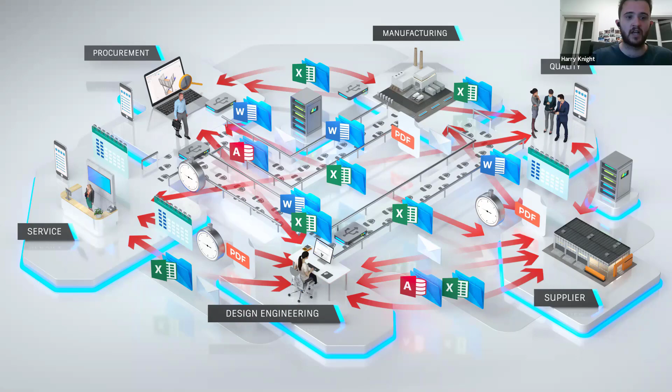To combat these challenges and capitalize on the ongoing convergence of design and manufacturing, there's a definite need to connect and automate design and manufacturing processes, so we can reduce iterations, errors, and improve delivery times. Furthermore, advancements in cloud computing and mobile technology, combined with automation, allow us to bring new means of collaborative working to manufacturing.

So Fusion, to take advantage of this shift, has been built to reimagine the product development process and provide people with access to their data in a connected, flexible, and seamless way. To do this, we've brought technology together that's previously been delivered separately, and we're investing rapidly in intelligent means of automation.

Furthermore, Fusion's software has been architected so that collaboration is a natural part of the design and manufacturing process. This means we're positioning you to start working in new ways, in an industry where no other software vendor, that I'm aware of, has this type of planned-out strategic approach. It means we can provide you with the technology to take advantage of the next-generation workflows available inside Fusion.

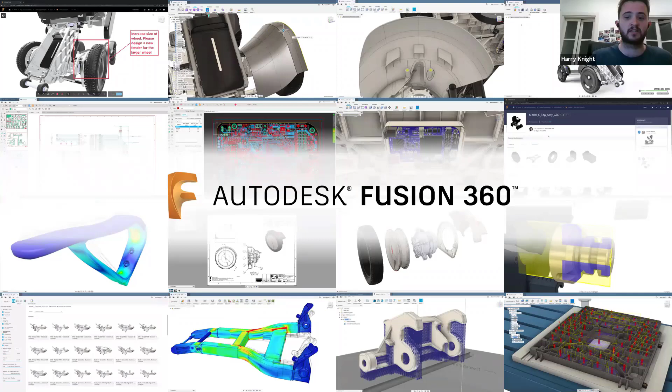Like I mentioned at the start, we need to find a new way of thinking, a new possible. We believe Fusion 360 is that new way of thinking, that new possible. It enables product designers and manufacturing innovators to achieve this new possibility in the way they imagine, collaborate, and create. It allows businesses the agility and connectivity to meet growing demands, allowing you to spend more time innovating as opposed to iterating.

It gives you the ability to achieve the new possible in ways that better your business, to shape a much more thriving future. And just touching on one of the final things here, one of Fusion 360's great capabilities is its flexibility. By flexible, I mean it really is a flexible piece of software.

So you have things like the flexible subscription model, where we're able to go from 1 month to a year to 3 years. You can switch it on and off whenever you feel like. You've also got flexible account management and CAD/CAM modeling.

The operating systems you can work on include Windows and Mac, or even your mobile, your phone, tablet, whatever it may be. Because your data is stored in the cloud, you can access it from anywhere.

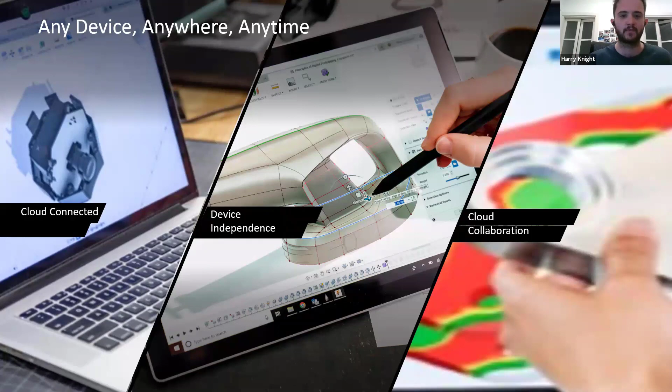So even if you go to a customer and you haven't got your laptop with you, you can just log onto a web browser with your username and password and show them what you want on Fusion 360. And then finally, a good handover point here for Jonathan, is the idea that you've all joined: the flexibility of remote working, because you can access that data from anywhere on any device.

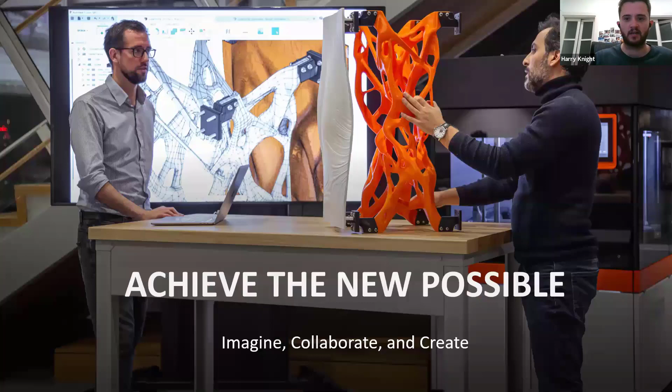As Harry mentioned, we'll be looking at several different points inside Fusion and inside Fusion Team, and we'll be doing all of this live because otherwise it wouldn't be as exciting or compelling to show you what the software does and how reliable these cloud services are. So a brief overview of the topics we'll cover: first, what accessing wherever you are actually means. We'll have a look at the licenses and system requirements for Fusion that you require. What teamwork means with Fusion and Fusion Team, and how that can make your dream work. What the power of the cloud can offer you for your day-to-day work.

How you can work with anyone and any existing data using the technology called AnyCAD. You can even work offline, even though this is a cloud-connected tool. And then at the end, I'll give you a brief peek into our roadmap, which is actually a big part of how we communicate with our customers, because we like to be open and engaging with our community.

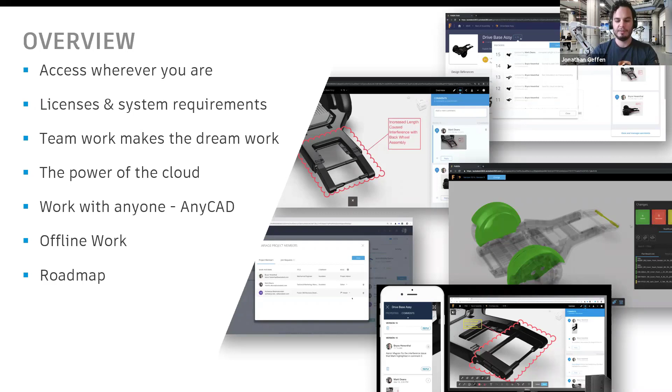So let's look at what we mean by accessing wherever you are. Fusion, different from traditional CAD software, is cloud-based, and that means your license is actually attached to your Autodesk account. So that means if you want to log into Fusion, you use a username and password instead of serial keys or dongles that you would have had to pass around in the past.

What this also enables you to do is sign in on different computers at the same time. You can only work on one computer at a time, though.

Let me give you an example scenario. This happened to me a bunch of times in the past: you're working on something in the office in your CAD tool of choice, then you go home, done for the day, and at home you realize, oh no, I need to make a change for the presentation tomorrow. So you try to log on to your software, but you can't because you're still logged in at work. Fusion can completely deal with this, because you have session management, which means once you log on at home, you can just pause the session at work and continue working as if nothing happened, continuously, on your computer at home.

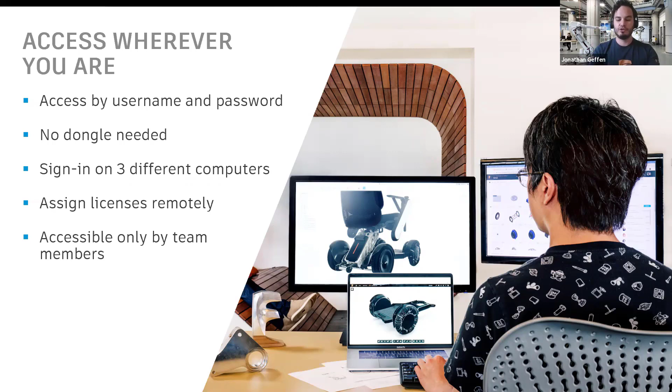Also, license management is done centrally and remotely. So for you admins out there managing all the licenses your team members are using, you can assign these licenses from a central position inside the Autodesk account page. And of course, your data is only accessible by the team members who are actually inside your team and your projects. We'll look at the details of that granularity of control over who accesses your data in a second.

Regarding system requirements, we get asked this a lot, actually. I see this question a lot on forums, people asking, hey, what computer should I get for Fusion? Actually, Fusion requires much lower system requirements than traditional CAD packages, because it's built in a new way, on a new architecture, so it can leverage multiple cores and, of course, outsource certain very resource-intensive tasks to the cloud. That also means you don't have to worry about so-called approved hardware, where you'd need a specific graphics card to qualify for support.

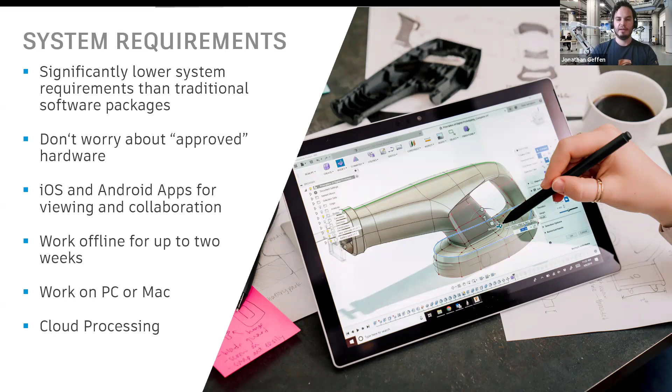As Harry mentioned, you can work on a PC or a Mac, so it's platform independent. There are even apps for iOS and Android for viewing and collaboration, for commenting and things like that. And you can even work offline for up to two weeks if you need to. But when you jump back online, then you can, of course, leverage the amazing advantages of cloud processing.

Now, just one last slide before we jump into the software: teamwork, collaborating in a team, can make your dream work, and it usually does, but oftentimes there are roadblocks to that teamwork.

So how do you usually access your data? How do you access your versioning?

Fusion Team is the backbone of how Fusion works collaboratively. You can manage permissions, files, versions, markups, and comments all from one single place. And you can connect teams across departments and multiple locations because it's cloud connected. So let's dive into Fusion right now.

I'll show you this design I have open, which is a pump assembly. I'm working on this collaboratively with my colleagues. I have certain team members, and I can see a comment actually just popped up. This is live - my partner Michael just made a comment 15 seconds ago.

I can open this up in my comment section on my CAD tool. If I click on that comment, it takes me to the location where Michael made this comment, and if I open this up, it lets me view this one-to-one to see what Michael actually wants me to do.

So he said, hey, can you please reduce the size of those fillets over here? Let's go ahead and do this. First, let me pop out this comments window and say, sure, I'll work on it, and post that back.

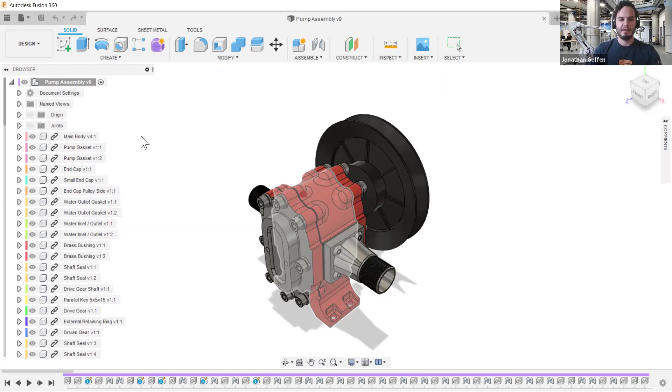This lets Michael know that I'm going to start working on this. I can dive into this main body where he wants me to make an edit and actually edit it in the context of the assembly, without having to open up this part separately.

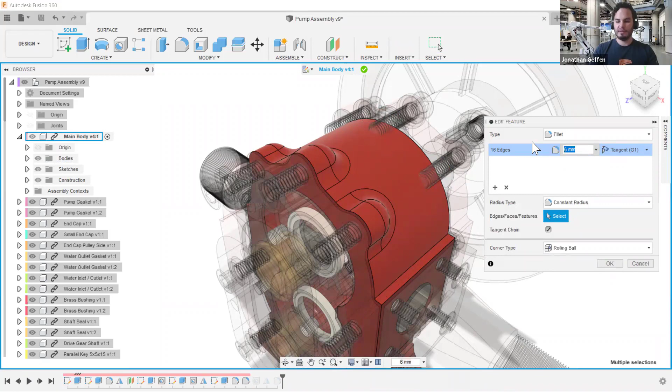I know the fillets are controlled by this little feature here in the timeline. Let me open that up and reduce it down to maybe 4 millimeters. All right, now my fillets are reduced.

I can finish my edit in place, zoom into here, open up my comment section, and take a quick screenshot, pointing to a specific part of the model and say, hey Michael, I can actually comment him in there, so he will definitely be notified.

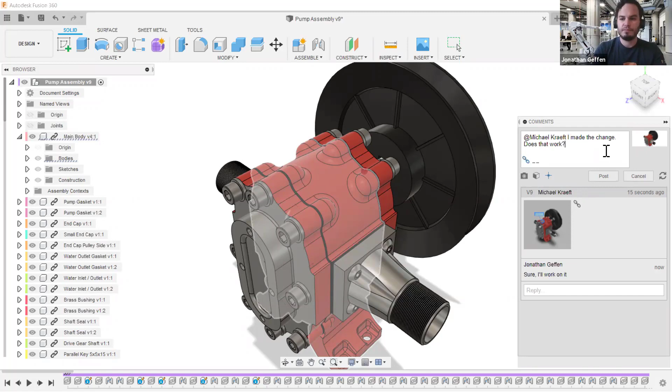I made the change - does that work? Then I can post this comment back, so he will be notified in either Fusion if he's working on it, or Fusion Team. This is how I can already collaborate on the data I'm actually working on.

And these comments refer to the versions of the file. So let me open up the data panel on the left-hand side. This is your connection to your data, because Fusion is a cloud-connected tool.

That means the software itself is installed on your computer, and all of the design, rendering, animation, simulation, and manufacturing - you can do all of this from the comfort of your hardware and your PC. And your data gets synchronized with your cloud.

Over here in my data panel, you can see on the top-hand side that I am working in a team account called EMEA Fusion 360 Technical Sales. That's where I do all of my technical sales demos. And I'm actually part of several other teams.

Every Fusion license comes with the ability to create one team, and with every Fusion license, you can participate in any other team that another user might have. That means you can collaborate with anyone who has Fusion worldwide, no matter their location or company.

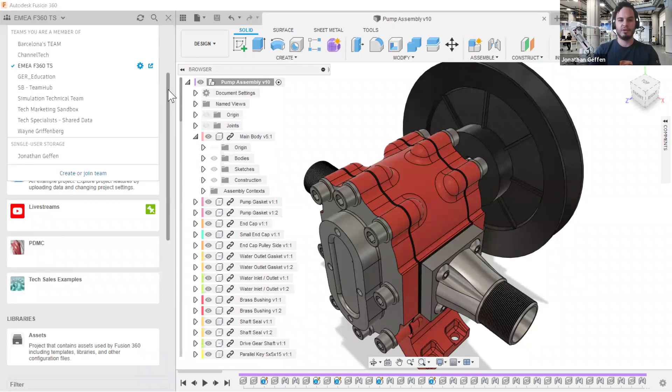I'm organizing my projects here - I can easily open up and create new projects, and I've pinned a couple of projects. This one we're working on right now is the collaboration webinar, and inside here I've got the pump that we currently have open on the right-hand side.

You can see I've already played around quite a bit with this model to create it and make some edits. This is actually already version number 10 of the model I've been creating.

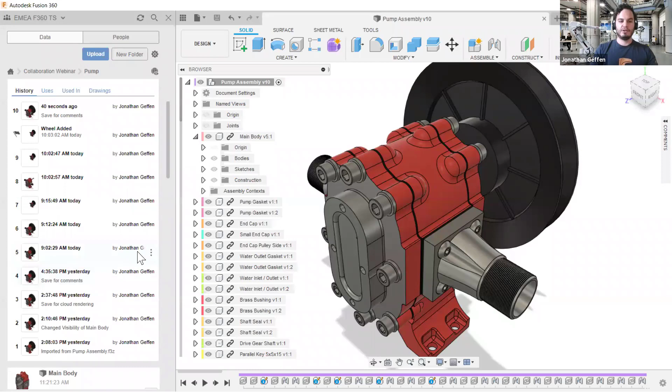If we open up the file, we can have a look at all 10 different versions that I created. You can see that Fusion has automatically recorded at what time these versions were created and by whom - that gives me an auditable trail of my design history.

At any point in time, if I need to, I can actually promote earlier versions to the top, or convert them to be milestones if I think this is a very important change to the design.

I have a little bit more granularity, which is I can have a look not just at the history, but also see what other parts my assembly is using, and I can open them up straight from here. So there's a connectivity between parts and assemblies. I can see whether this assembly is used in another assembly, which this one isn't, and I can check whether there are any drawings attached. Actually, here there is a drawing attached.

I would like to have a look at the content of my Fusion Team and my files on the web. I have different options to access this. If I want to access just this one file, I can view the details on the web from here, or view the details of my project on the web, or if I want to see the whole team, I can access that on the web over here.

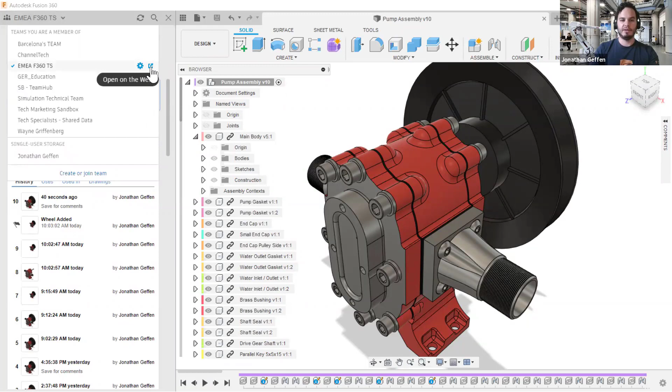So let's do just that, and I'll switch over to the browser where it's just opened up. Here I am now inside my Fusion Team, and you can see these are all of the projects that I'm currently working on. Let's dive into the collaboration webinar, and you'll see that the page for the webinar project is set up in a couple of different environments.

For one, we've got the content that we're working with. I can organize my files into folders. I've got a trash bin where I can revive deleted files if I need to. And I can even upload different file types that don't necessarily have to be Fusion files. You can upload any file type you like and use these inside Fusion Team as data storage.

In the second tab, I can see which project members are part of the project I'm working with. Here I've got 4 different people, 3 colleagues that I invited. If I wanted to, I could, for example, set Harry to be a viewer, and then he would only be able to view the files, not make any edits. But I'm going to revert that - I want him to be able to make edits.

In the wiki pages, you have the possibility to create a kind of documentation of the projects you're working with, which can be quite powerful if you want to document certain policies around the project or certain necessary information. So I've, for example, entered here the title and description of this webinar, because that's the project we're working in right now.

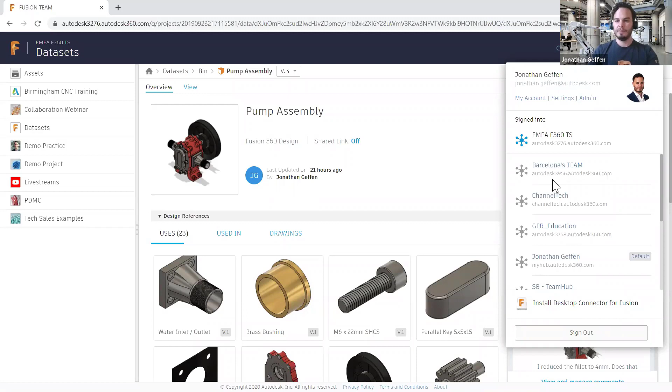On the very top right-hand side, you've got your profile, which gives you access to the different teams you're a part of, and the desktop connector for Fusion, which I'll show you a little bit later on how that works. From here, you can access, for example, your Autodesk account, where you can manage licenses and any updates you're doing - you can assign licenses to several users if you need to. Then you've got your settings tab, which is where you would set up your default team - for example, I want my default team to be the EMEA technical sales team.

And I've also got a personal hub where I can work on my personal projects. And if I want to, I can also leave any teams that I was made part of if I need to.

Just a short note on preview. I've turned this preview on, which gives me access to my projects on the left-hand side. If you disable this, you will not have this navigation panel. And this theme of enabling you to preview functionality is quite common in Fusion.

Let's have a look also at the admin tab. Over here, we can see we can set the team settings - any team name changes, whether I want to allow my team members to be able to share files with external collaborators, and whether it is necessary for team members to be invited and actually approved to join my team. Of course, I want this because I don't want anyone to be able to join my team.

Then I can check out here the members and roles of active participants, for example, whether there are any pending invitations or sent invitations that haven't been accepted yet by the people working in my team.

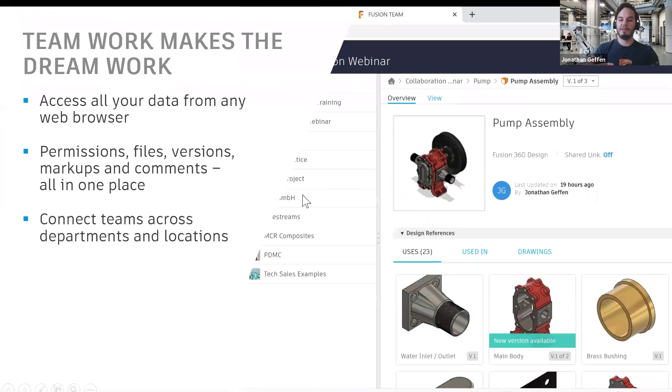So this is basically Fusion Team, and this is the backbone again of making that collaboration work.

Now let's have a look at what the power of the cloud means and how it enables you to effectively collaborate also with outsiders. You can share designs instantly with stakeholders without them even needing any CAD tool. You have a built-in file conversion, so you don't have to export files to certain versions for them to be downloaded. You can even host non-Fusion files if you want, compare versions, and you can comment, markup, and mention team members as I showed you before.

So let's jump back into Fusion and have a look at how we would do this over here if we wanted to share this assembly with someone else.

On any Fusion file, you can just right-click and elect to share a public link. This allows you to share an always up-to-date link, which will always refer to the most up-to-date version of your file with anyone who has this link. You can select whether this should be able to be downloaded or not. And if you need to, you can also set a password to specifically secure this link, so only people with the password can access it.

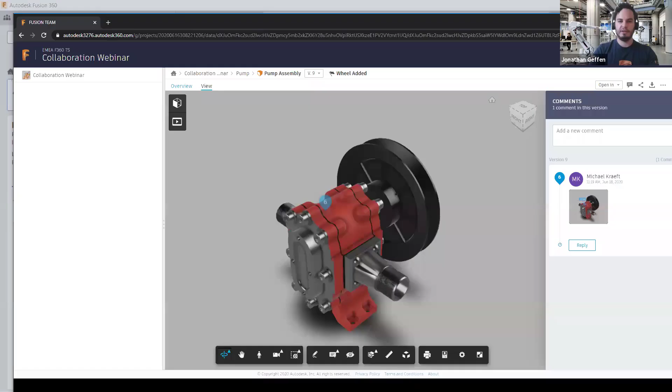So let's copy this link over here, and I will open up a different browser now, which lets me show you what this would look like when someone accesses your link without you actually being logged in. So let's actually open up a new incognito window because I seem to be still logged in over here.

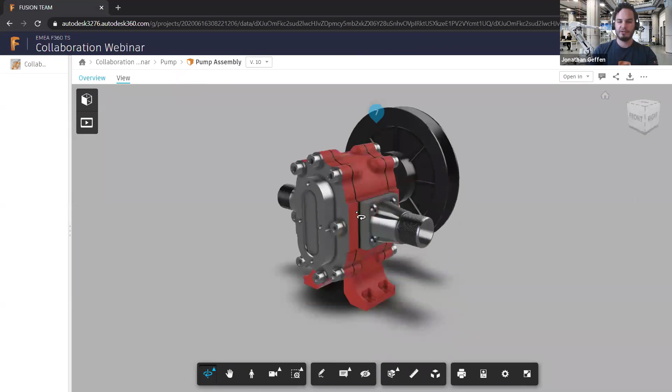This will let you access your file and view your data straight on the browser. And this works from any web browser, even on a mobile device or a tablet, you can view your design in 3D without having to install any plugins.

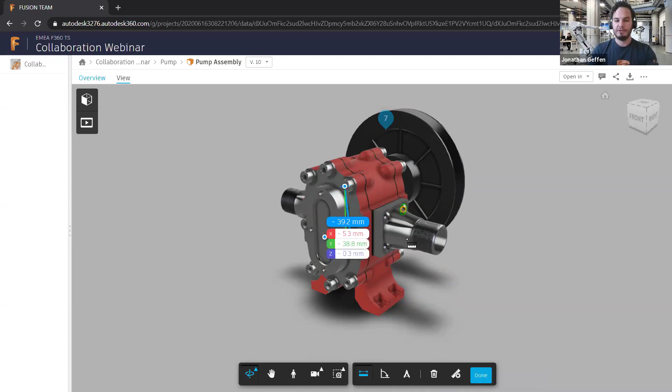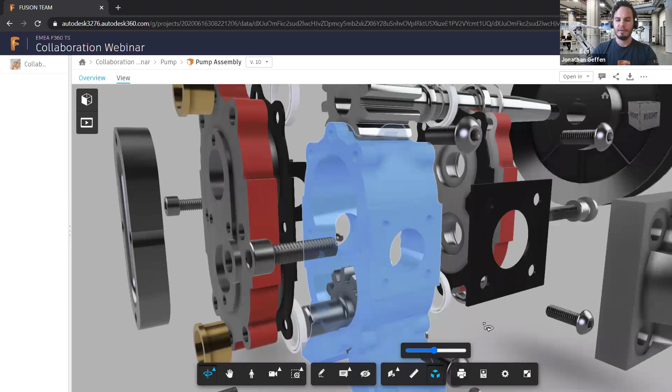This viewer is not just a viewer, but it actually enables you to do things like create measurements. You can create section views to look inside your model and see what's going on, explode your model to see all of the components inside. You can dive into each one, look at the properties of each component, the mass and volume, etc.

So you have a lot of capabilities here inside Fusion Team, even for external collaborators. Now let's switch back to my own Fusion Team where I'm logged in, and I'll show you a bit more about project coordination. I'm now in the pump folder, and if I scroll down, you can see this pump assembly is currently open and in use by me because I've got it open in Fusion 360 at the same time. This allows you to control who is currently working on which file, and if needed, you can elect not to edit this file while it's in use.

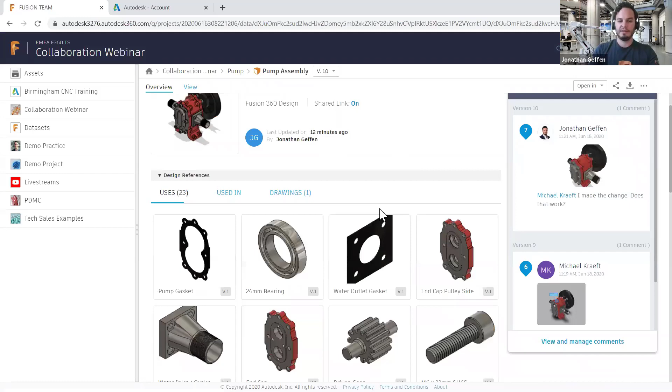If we look at each of these files, we can see the connected parts associated with this file, whether there are any drawings attached, like here, for example, there's a drawing. There's also a rendering saved alongside, and an animation inside here which I could view if I wanted to.

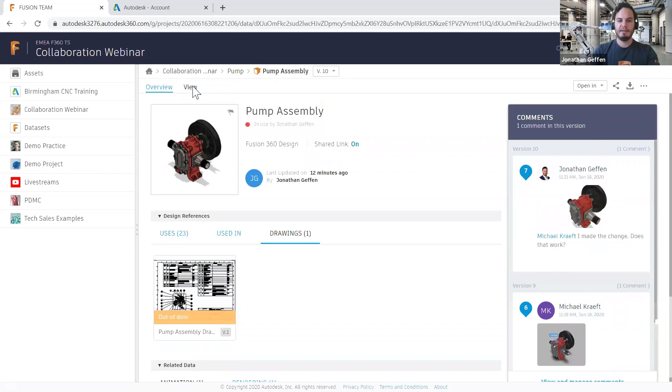On the right-hand side, we've got our comment section with the comments we made a little earlier. And if I view this file again over here, we have the possibility to again view our entire design in 3D, and if we want to, even export this to a different file type.

This is exactly what being able to download files from the shareable link will do for your customers too. They can elect to download different file types, even though you haven't exported them to a different format yet. So this can be quite powerful.

I know that in the past, I used to just share a screenshot with someone and say, this is the file, then have to export a step file so it's universally understandable. Then maybe something gets updated in the meantime, so I have to send another step file, and this can be quite tedious and slow, especially if the files are large. So this is a great way of collaborating with each other on these files.

Also, while you're in here, you have access to different versions of the files if you need to. So you can view all of the different versions of this file, and you can see I've actually got a milestone over here where I added this flywheel on the side.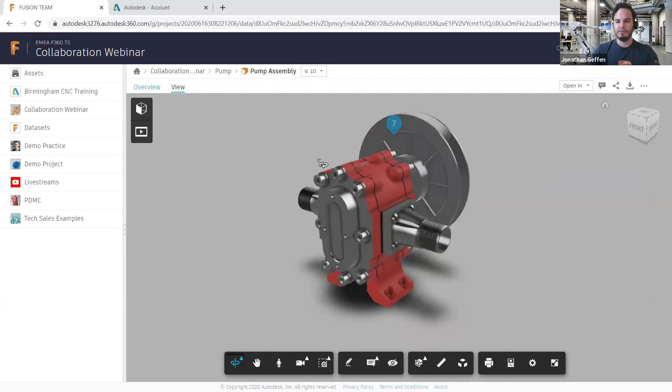If I want to, I can go inside and compare versions and select which versions I want to compare. So for example, maybe I'd like to compare version 9 against version 8, and view the design changes that were made.

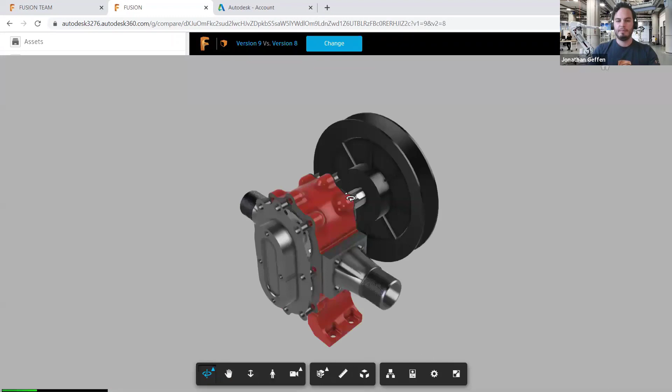It will take in both of these versions and show what was actually added, whether any files were removed, whether anything was modified, and I can dive into each one of these components and see which changes were made. So that gives you a great method of tracking changes live with the versions you're creating from Fusion.

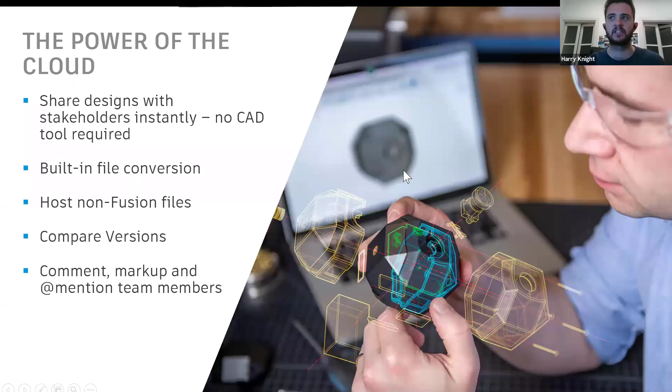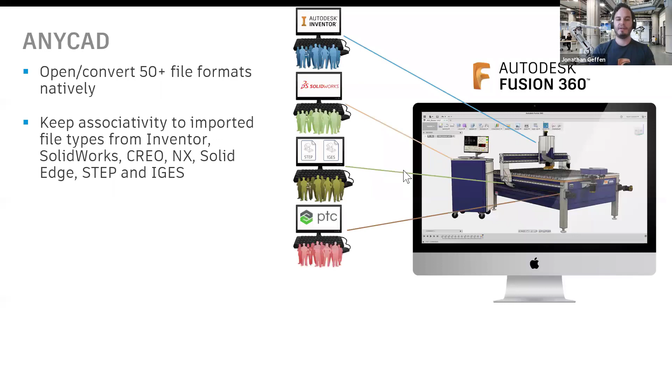Perfect, that's exactly the right cue for the next slide, actually. This is the technology that we call AnyCAD. What AnyCAD actually does is it doesn't just let you open and convert over 50 different file types natively, but it actually lets you keep associativity from imported file types from Inventor, SolidWorks, Creo, NX, Solid Edge, STEP, and IGES file formats. So what this means, and to me when I saw this the first time, it was quite mind-bending, because I hadn't seen any technology do this associatively before.

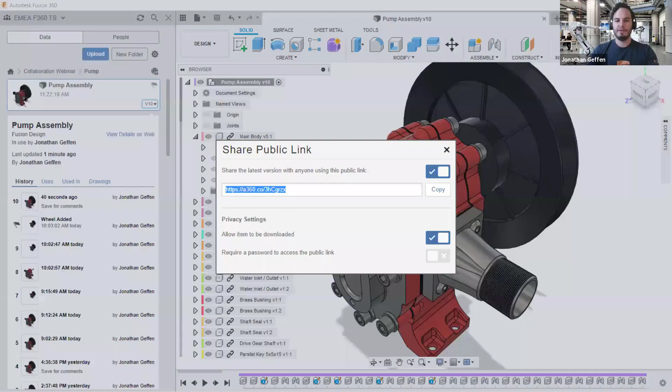What this means is, let's jump back into Fusion over here and jump out of this public link. I actually have a file over here that someone sent me, which is a SolidWorks file. If I show you the versions of these different file types, you will see that this is still currently a solid part file. This hasn't been converted in any way yet.

Once I double click this file, it actually creates a Fusion readable and manageable file, which I can work on. So if I open this up, this is a clutch cover for a motorbike, and this is still referring to the original solid part file.

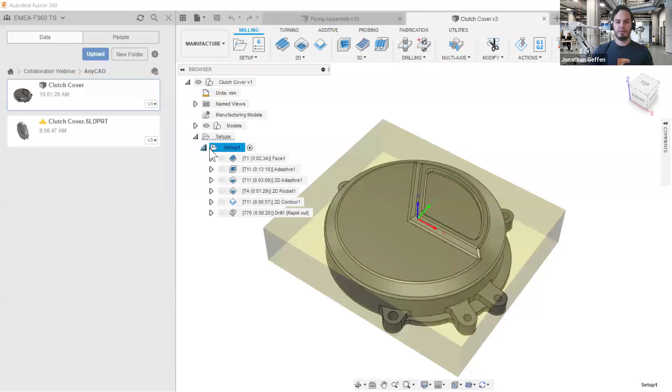So what I've done over here is I've actually gone into the manufacturing environment, and I've created a quick setup with a bunch of tool paths to actually cut out this part. So if I want to, I can go ahead and simulate this.

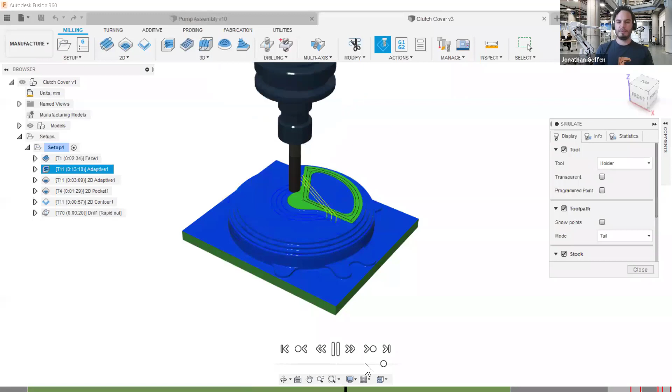Let's turn on some of these parts here, and I can have a look how this part is being slowly cut out. I've spent a fair amount of time on creating the toolpaths because, of course, these are multiple operations, multiple different tools. I need to manage my library, etc., in order for this to actually work and be able to be manufactured.

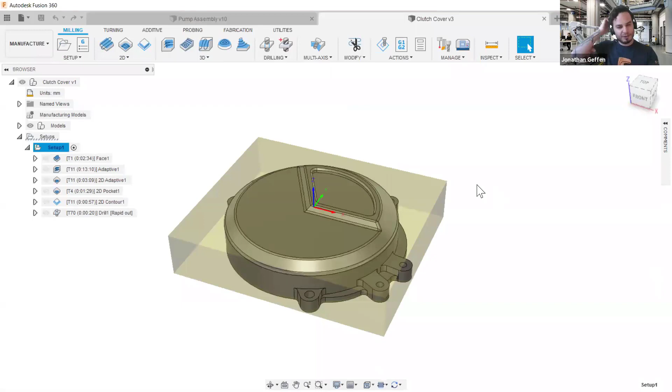Now, what happens if at the last moment, and I know this always happens at the last moment, at the most inconvenient moment, my colleague says, hey, you know what, I made a mistake with the file, we actually need to change something before we go into manufacturing. And I've already spent a bunch of time on this file creating those toolpaths.

So because I have used this imported solid part and I haven't actually converted it to any other file type, I can now switch over to my Explorer.

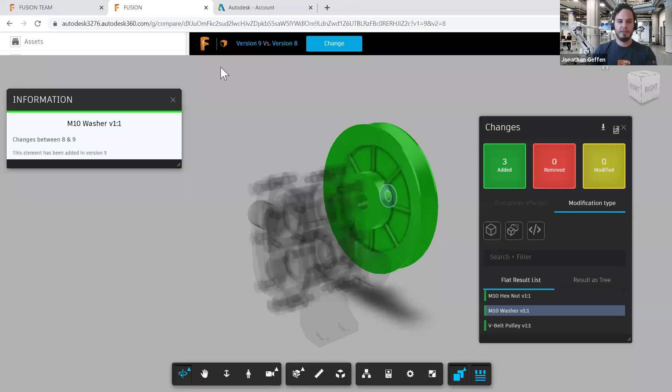And over here, I have what I briefly showed you in the Fusion team. Let me jump back here and show you where that is located. So you can go over here and download the desktop connector for Fusion. What this does is it basically mounts the Fusion projects as a virtual drive on your Explorer, so you have access straight from inside here.

You can go into my team here. I have my collaboration webinar in here and the AnyCAD file that I was just working on. And in my second browser window here, I have actually the second version of this clutch cover that was sent to me as a change.

So let me just copy this and paste it in here. Control V, and then it'll ask me, do I want to copy all? Yeah, let's copy all. And the desktop connector will automatically upload this file and then push it to my Fusion team. So if we switch back here to Fusion, now you can see that data has been renewed.

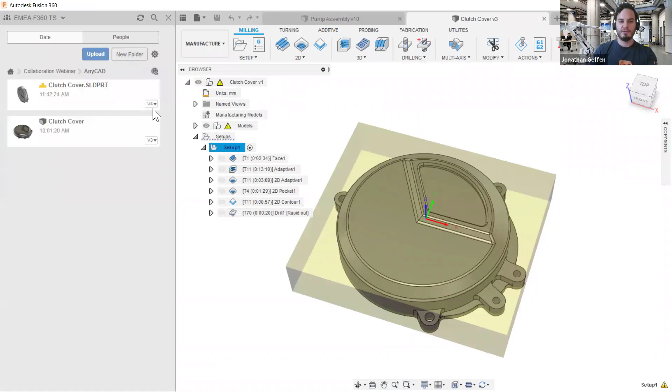There's now a version 4 of this file. If I jump back into the design environment, I can say this component is out of date, let's pull in the new version. And I can see here that the angle of this top pocket will have changed once it's pulled in.

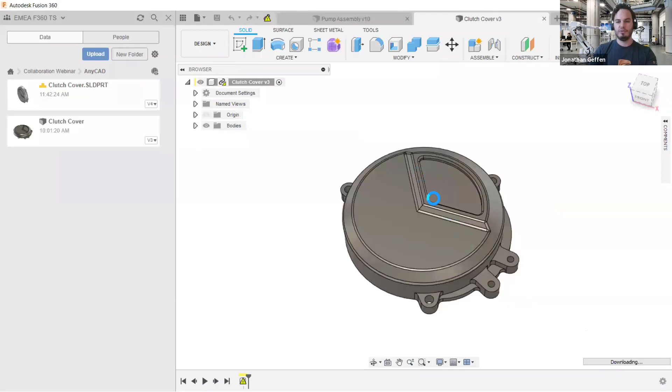So you can see it bringing in the new version here. It's currently downloading, and now this angle has changed. Because I've already spent so much time on manufacturing, all of my toolpaths are out of date because they're referencing the old pocket.

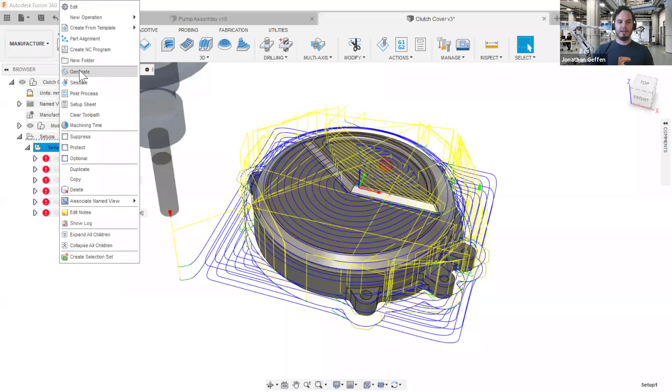But because Fusion is working associatively with the different file types, all I have to do is right-click and select generate, and it will regenerate all of the toolpaths based on the geometry changes I made with the new version, without me even having to convert the original file type to a Fusion file.

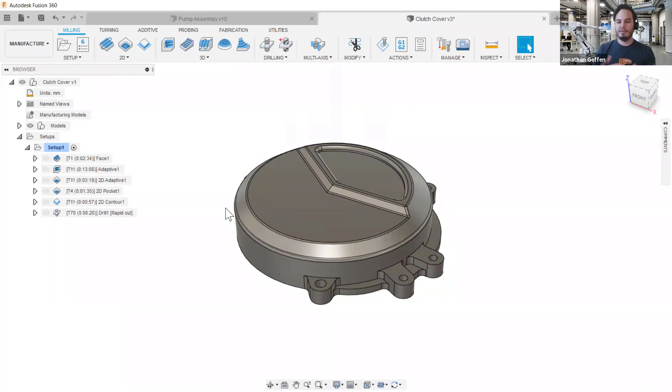So everything has adapted correctly, and I can now go to manufacture. That is the real huge power of Fusion, that you can work collaboratively even with existing data, or as we know, we live in environments where we deal with different data formats and software types. So this is exactly that AnyCAD functionality and what it does.

I hope that answered the question. I think it definitely has done. Actually, just while we're on that, John, there was one more question that popped up.

Yeah, it's more about usability in terms of Fusion. It was more, if you know other software such as PowerShape for example, how similar would Fusion be to kind of pick up and work with? I know it's not quite our topic today, but sure.

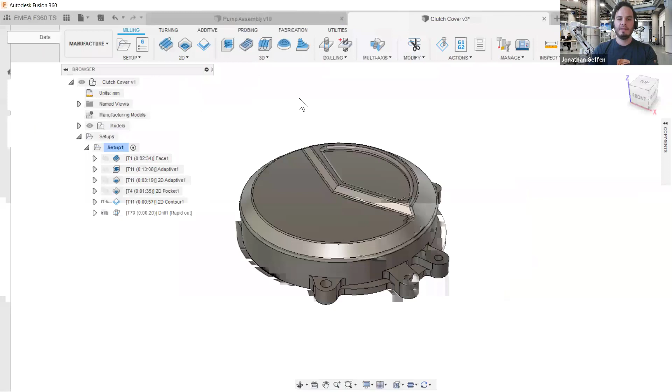Actually this is a good topic because Fusion is a very powerful tool, as I hope I've already been able to show you. It has a lot of areas and a lot of tools, but in comparison to other tools, especially traditional CAD tools, it seems a little simpler, whereas the functionality is actually just as or even more powerful. The reason being that Fusion was built up from the ground completely new, and it's just a very modern tool to work with.

What's really great about Fusion is that it kind of explains itself in the usage. So whenever I hover over any feature that I'm using, it explains itself, so I don't have to have a help file open at the same time.

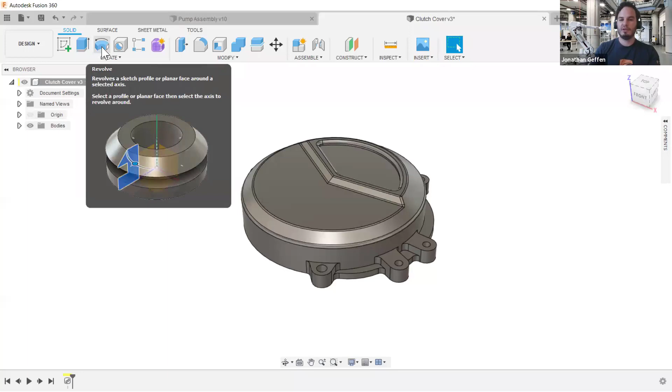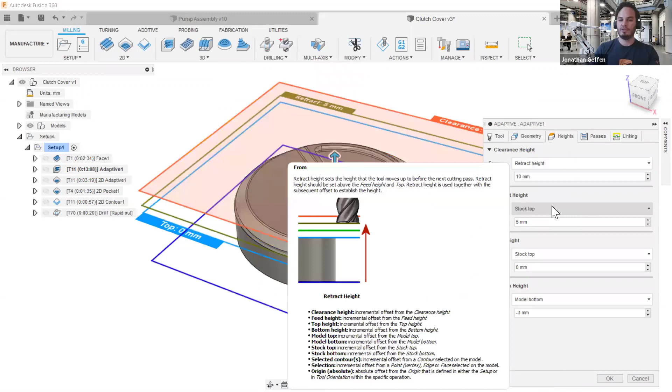For example, if I go into manufacturing, and I know this can be quite intimidating for some people to move into these areas when you don't quite know what this does, there are extensive tooltips that explain exactly what the software is doing, which areas you can change, and what that actually means for your settings.

So you're basically learning the tool while you're working, and that's really the best way to learn. In addition to that, we have up here our little help file, where we can open up a learning panel that gives you access to in-product tutorials.

And also you've got the learning and documentation page, where I would suggest going to the self-paced learning, which is a collection of learning paths that you can go through at your own pace, learning Fusion really from the ground up.

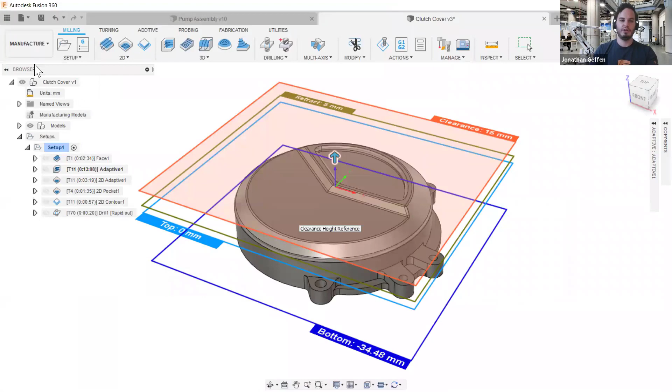And of course there's also a learning path around administration and Fusion team, introduction to Fusion modeling, transitioning from other software types, and anything in mechanical assemblies, generative design, product design with electronics, simulation, manufacturing, etc. So there's a lot of resources here for you to easily learn Fusion and adopt it as your CAD tool.

So let's move to the next point, which is offline work. I know this happens sometimes, especially as you're working from home. You cannot always guarantee that your fuses won't blow or things like that, and maybe your internet connection will die. This has happened to me in the past.

And most of the time when we talk to customers and they hear cloud, they're afraid that they require the cloud to be able to design and continue to work on their designs. In Fusion that's not the case, because you can actually set your status to offline, or if you don't have an internet connection, you will be working offline.

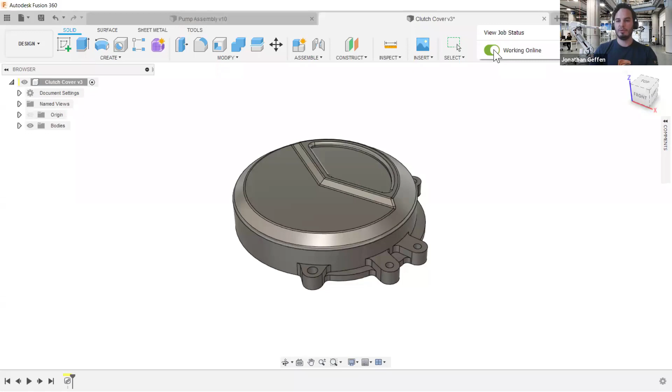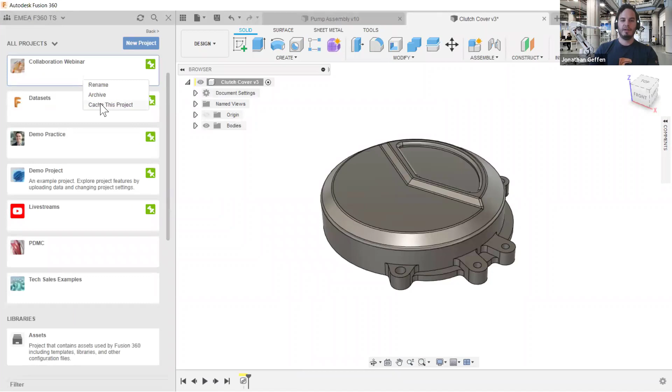In that case, you will have all of the projects that you have cached for offline use available to you. So if I want to, I can add, for example, this file here to my offline cache, or I can add an entire folder to my offline cache, or even my entire project, enabling me to continue to work even when the internet connection is out, or if you're on the go and don't have an internet connection, and still have all the tools available to you inside Fusion to continue your design.

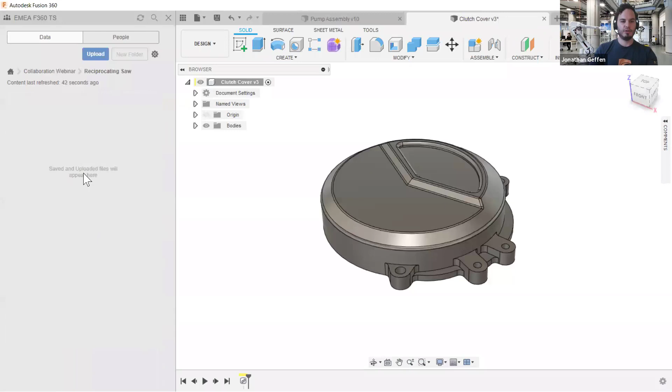So let's quickly make that switch. We can decide now to work offline. Let's have a look at which files are available here. These ones, because I'm working on them recently, are all of course available. But these ones, for example, are not available offline because I haven't cached them. Once we go back online again, Fusion will take all of the changes and versions you might have created during your offline period, and upload and synchronize them with your Fusion team completely effortlessly.

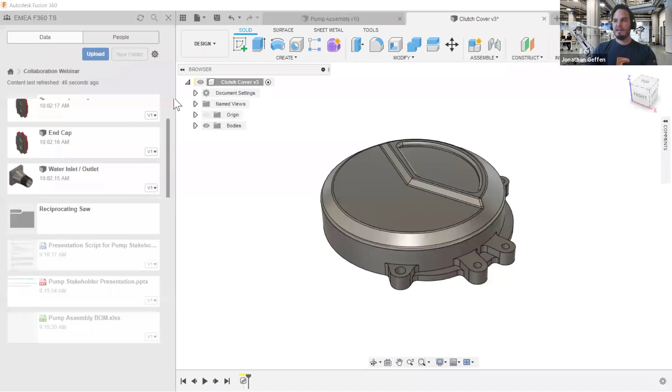Now, while this is going back online, let's go to the next area, which is cloud services. This is also part of the power of the cloud, where there are certain elements inside Fusion that you can use the cloud for so you don't have to rely on your computer hardware, and certain areas where you need the cloud because those types of tasks are usually so resource intensive that consumer grade PCs just wouldn't be able to handle them.

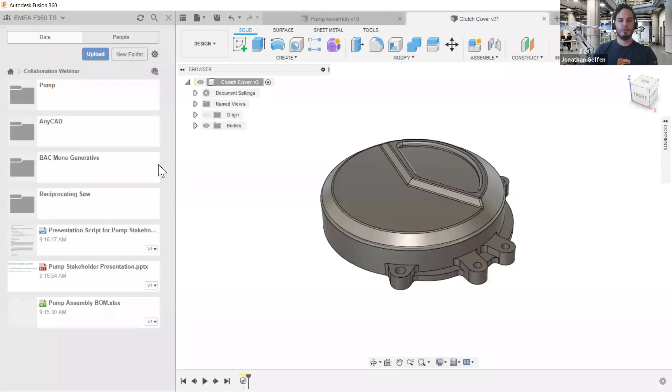So the cloud services leveraged by Fusion are generative design, rendering, and simulation. And of course, AnyCAD functionality I showed you just now that enables you to work with external file formats and export to different file formats even without creating those files. Now that we're back online, we can have a look at those areas in the pump assembly.

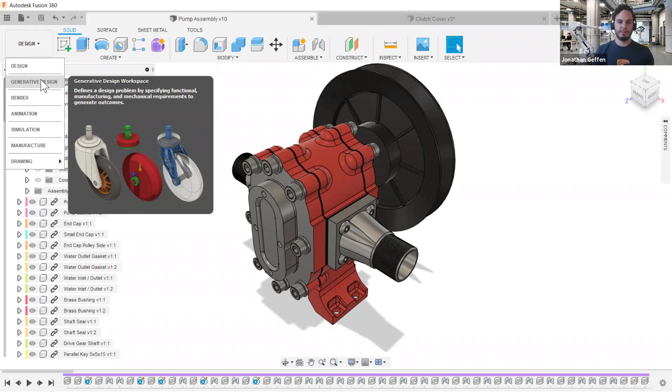So here you have generative design, which connects you to an AI to solve geometric problems based on loads, manufacturability, materials, and physical properties that you need your component to solve. This works most of the time, or most of our customers use this for part consolidation, if you want to create one part out of several different components, or for lightweighting especially.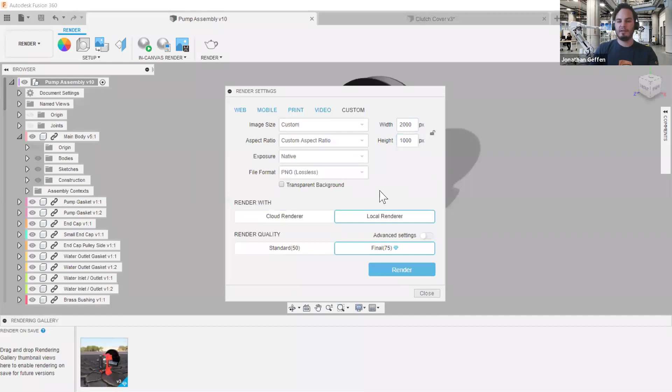In the rendering environment, for example, if we switch into here, you can elect to render this piece directly on your hardware — and I'm working on a laptop, so you don't need a supercomputer to create renderings. But if you want to continue working at the same time, you can elect to render this image straight on the cloud, say at 2000 by 1000 pixels, and render either locally on your machine or on the cloud.

And if you switch to simulation, you'll see there are several different simulation types you can use inside Fusion. The more advanced ones — electronics cooling, structural buckling, nonlinear static stress, event simulation, and shape optimization — all have this little cloud icon in the bottom right corner, meaning they require the cloud to be solved, because they're usually so intensive, especially things like event simulation, that you just require more power. The great thing is you can set up these simulation types and let them run in the cloud in parallel while you continue to work, saving you a huge bunch of time and resources.

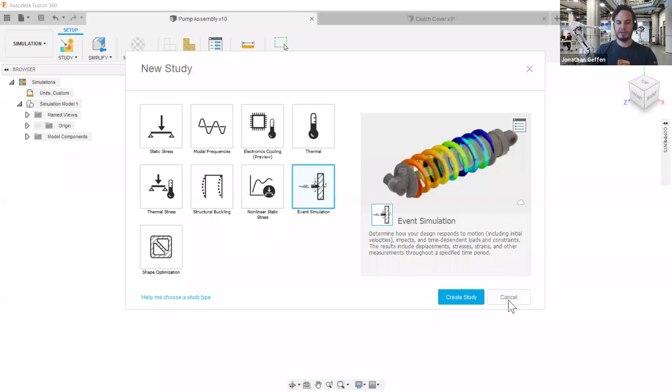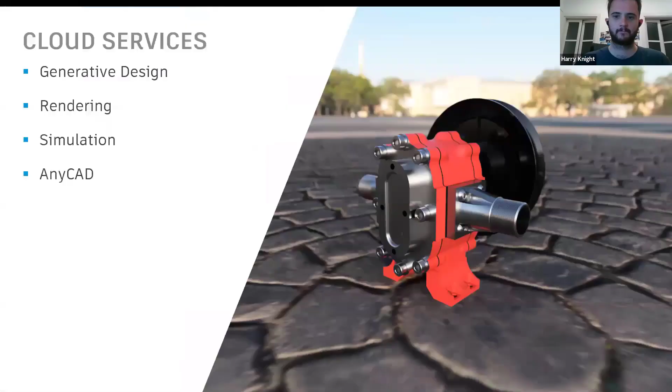All right, so this basically wraps up what we're talking about inside Fusion. Now I want to give you a brief overview of what's going to come into Fusion. We just recently, about a week ago, released a new roadmap, and one part of this roadmap is centered around collaboration, data management, and lifecycle management. We've listened for a long time to our customers, and we've heard all of your requirements and wishes.

There are a lot of amazing features that you will be able to experience inside Fusion sometime soon. That can entail item numbering, release and revision management, change orders and workflow management. You have a consistent data experience where you will be able to access your files straight from Fusion. You can design concurrently at the same time with different users and implicitly reserve certain file types.

Please note, of course, because this is a roadmap and a preview, we cannot promise that these features will come into Fusion, but we do communicate them.

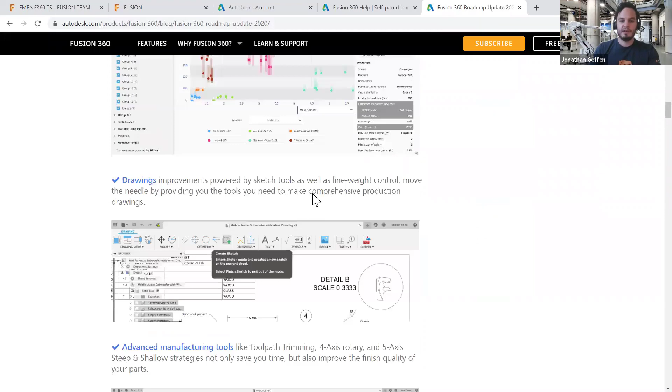So what I want to make you aware of in the browser, if we switch into the Fusion 360 roadmap, let me just Google that really quickly. The last roadmap update for 2020 is on our Fusion blog, so I would really encourage you to have a look at this. There's an overview of the areas that were recently implemented since the last roadmap update, and here is what we're working on. Here you will see the part with collaboration and data management, and you can read about all of the projects that are currently in progress and a little preview of what that might mean. So I'm super, super excited about the future of Fusion.

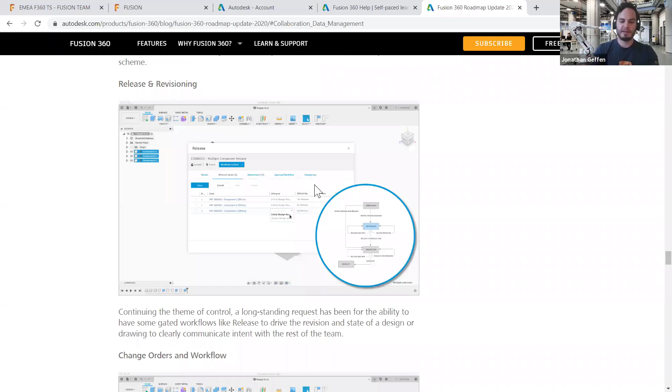Fusion is constantly being updated. That's another big advantage of it being cloud connected. You don't have to wait for service packs or things like that. You're always working with the most up-to-date version of Fusion, and that will always give you access to the most up-to-date and cutting-edge tools.

So with that... well, actually, just before, Jonathan, there was two more questions that came in that I just want to quickly touch on, if possible. The first one was, is there a desktop connector for Mac computers?

That is a good question. I'm actually not sure, because I work on Windows only. Have you tried downloading the desktop connector for Mac? I'm actually unsure about this question. So please, if you do have questions, send us a mail, and we'll get back to you with more information.

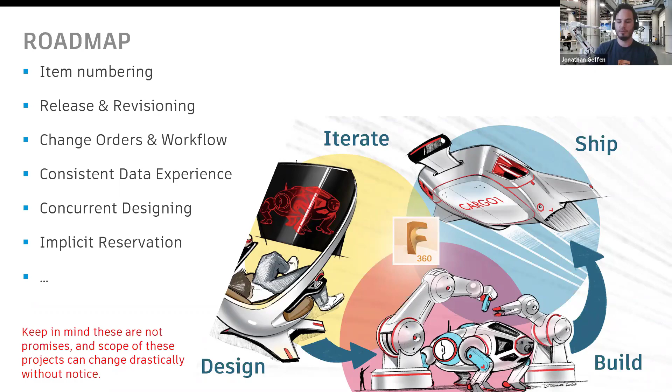Yeah, and there was one other question, which I know we're kind of pressed for time now. The other one was, can geometry changes be made in Fusion that work back to the original SolidWorks files? No, unfortunately not.

The history trees of different CAD vendors are unfortunately not communicated with the file type. So what we enable and what we see with the AnyCAD functionality is that our customers do live in an environment where you might have to work with different types of software, maybe even at the same time. We do actually see a lot of customers who have different tools for different areas of their work. So if you need to make changes constantly to the original file with the history, you can just do this in your other software, for example in SolidWorks or something like that. Then, using Desktop Connector, it'll automatically update in your Fusion files.

You can, however, if you want to, make edits to the files that you import. This is an area which is called direct modeling. It's not necessarily part of this webinar, but we have technology that enables you to make direct edits to the models that you import inside Fusion.